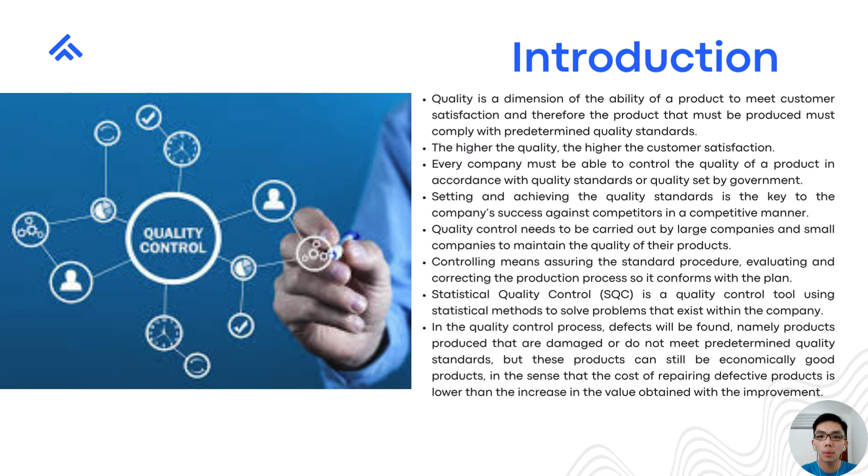Defective products are products that the manufacturer does not want, but sometimes the existence of a defective product itself is unavoidable and even always exists in the production process. The existence of a defective product within the company may not be used by the company, but it can. Types of defects will vary in each industry.

This article mainly discusses the literature review on quality control over the years. The articles were gathered and organized into a comprehensive literature review that will give a broad understanding of the definition of quality control, its function, its relation to production process management, the quality control approach, and its tools.

Quality management is a way to improve performance continuously at every level of operation or process in every functional area of an organization using available human resources and capital. Quality management is all activities of the overall management function that determines quality policies, objectives, and responsibilities and implements them through tools such as quality planning, quality control, quality assurance, and quality improvement.

Quality planning is the establishment and development of goals and requirements for quality and the implementation of a quality system. Quality control is the techniques and operational activities used to meet quality requirements. Quality assurance is all planned and systematic actions implemented and demonstrated to provide sufficient confidence that the product will satisfy the need for a certain quality.

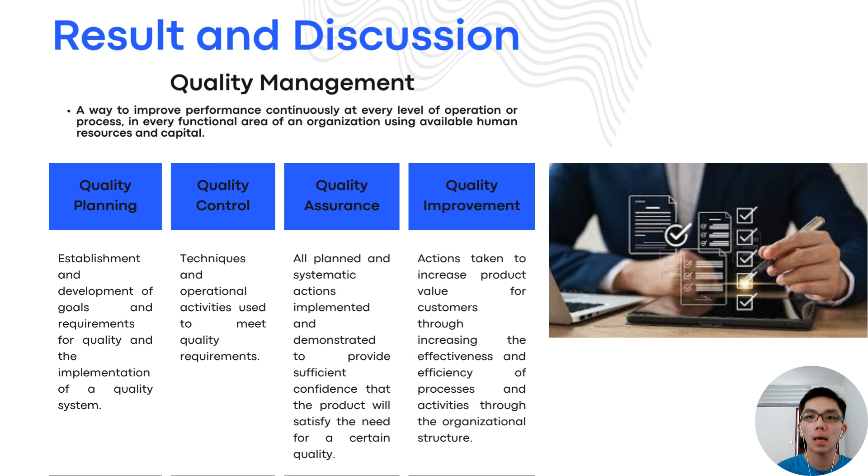Quality improvement are actions taken to increase product value for customers through increasing the effectiveness and efficiency of processes and activities through the organizational structure. Production management is an activity to organize and coordinate the use of human resources, tool resources, and financial and material resources effectively and efficiently in order to create and increase the use of goods or services.

Others argue that production management is an activity or process that transforms input into output. The main activity concerned with production management is the production process. The production process is a method and technique for creating or adding to the use of an item or service by using sources including labor, materials, funds, and other resources needed. In other words, the production process is the activity of how the product is finished from raw materials involving machinery, energy, technical knowledge, and others.

And some others see it from the perspective of methods and techniques used by people to transform raw material into products. Production process will result in products, which can be anything that can be offered to a market for attention, purchase, use, or consumption that can satisfy a want or need. Conceptually, the product is the subjective understanding of the manufacturer of something that can be offered as an effort to achieve organizational goals through fulfilling consumer needs and activities in accordance with organizational competence and capacity as well as market purchasing power.

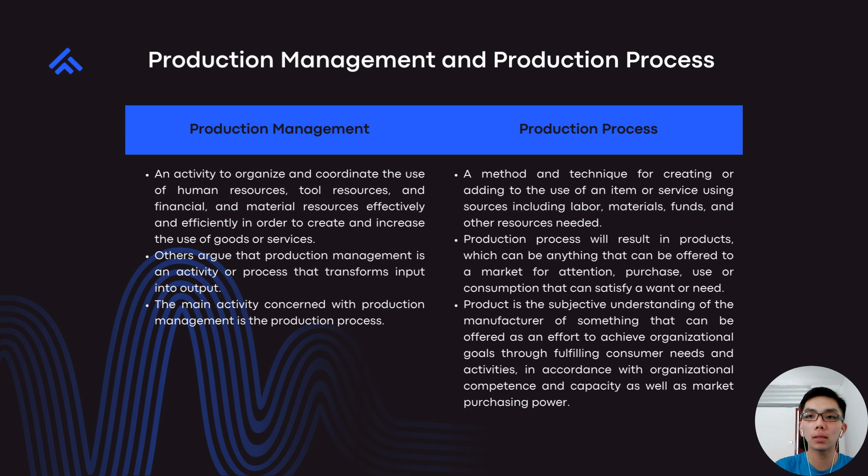Product is the central point of marketing activities because the product is the result of a company that can be offered to the market for consumption and is a tool for a company to achieve its goals. A product must have advantages over other products in terms of quality, design, shape, size, packaging, service, warranty, and taste in order to attract consumers to try and buy the product.

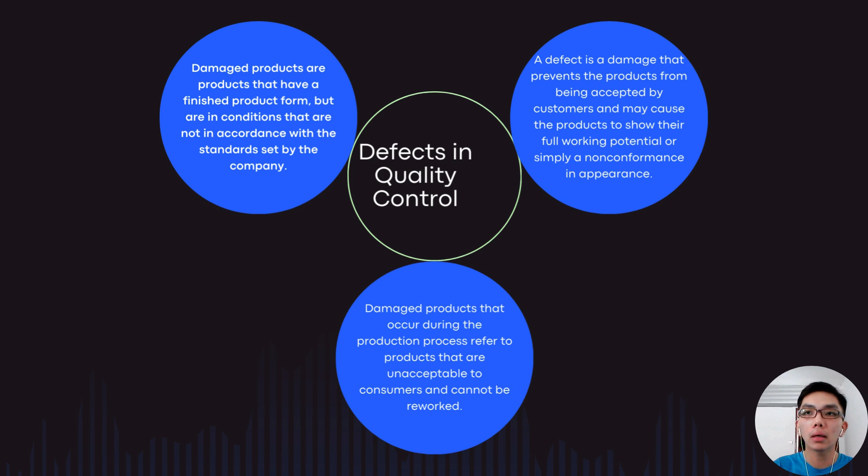Next is about the defects in quality control. Damaged products are products that have a finished product form but are in conditions that are not in accordance with the standards set by the company. There may be damaged products that can be sold, but there are also those that cannot be sold, depending on the condition of the item, whether the damage is within normal or abnormal limits. Damaged products that occur during the production process refer to products that are unacceptable to consumers and cannot be reworked.

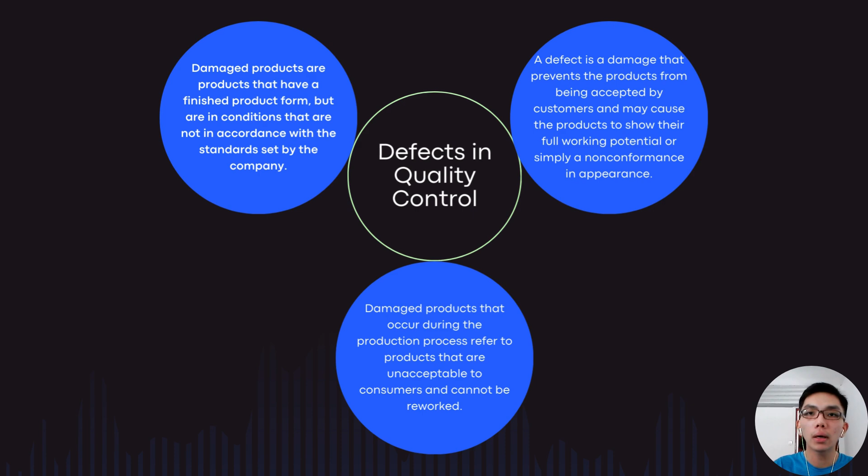A defect is a damage that prevents the products from being accepted by customers and may cause the products to not show their full working potential, or simply a non-conformance in appearance. Because consumers really want a quality product to meet their needs, companies are required to create a quality product for survival of the company. Therefore, today's companies must know and understand the ins and outs of customers by paying attention to the quality of a product produced. Quality is the totality of the characteristics of a product or service that supports its ability to meet specified needs. When we measure quality statistically, we look if there is any variation in measurement between what the customer asks for and what the company produces.

There are some factors that influence the quality control carried out by the companies. One of the factors is the process capability. The limits to be achieved must be adjusted to the capabilities of the existing process. There is no point in controlling a process within limits that exceed the capabilities of the existing process.

Next factor is applicable specifications. The specifications for the production results to be achieved must be applicable when viewed in terms of process capability and the desires or needs of the consumers to be achieved from these production results. In this case, it must be ascertained beforehand whether the specifications can apply from the two aspects mentioned above before quality control in the process can begin. Next factor is acceptable level of non-conformity.

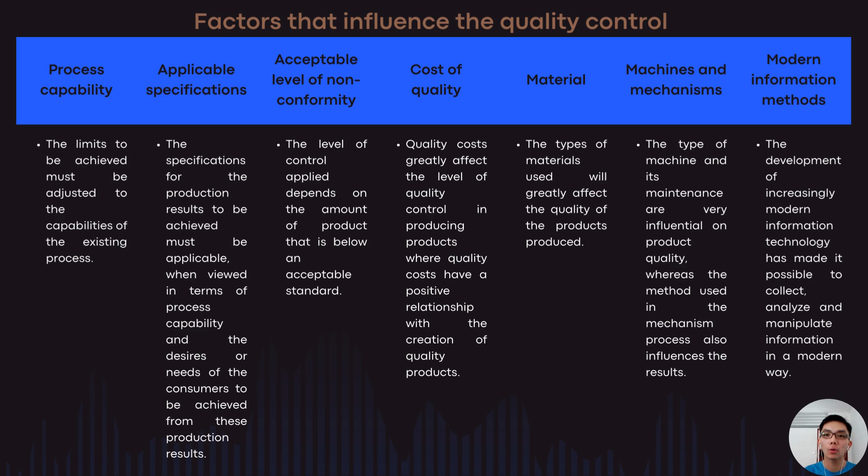Last but not least, modern information methods. The development of increasingly modern information technology has made it possible to collect, analyze, and manipulate information in a modern way. This sophisticated method of processing data and receiving information can affect the development of the quality of a product that is made. Information through computerization that is getting faster and more accurate in managing data and analyzing it also contributes to the success of product quality.

Next is about the quality control purpose and approach. Quality control is an important activity in the company to find out the damage that occurs to the product so that the company can maintain the quality of the products produced in accordance with the standards set by the company. The purpose of quality control is to control the quality of products or services that can satisfy consumers.

The objectives of quality control are to reduce errors and improve quality, inspire good teamwork, encourage involvement in the task, increase motivation in employees, create the ability to solve problems, improve communication and develop relationships between managers and employees, develop high security awareness, and promote employees and develop products properly.

Quality has very broad activities because all quality controls must be considered. Quality control can be broadly grouped into three levels. The first level is the raw materials approach. The raw materials balance approach is a very important factor for the continuity of the production process, which is very dependent on the availability of raw materials and the quality of the raw materials themselves. So, the company should also pay attention to quality control of raw materials. The company produces a product where the characteristics of raw materials greatly affect the characteristics of the products produced.

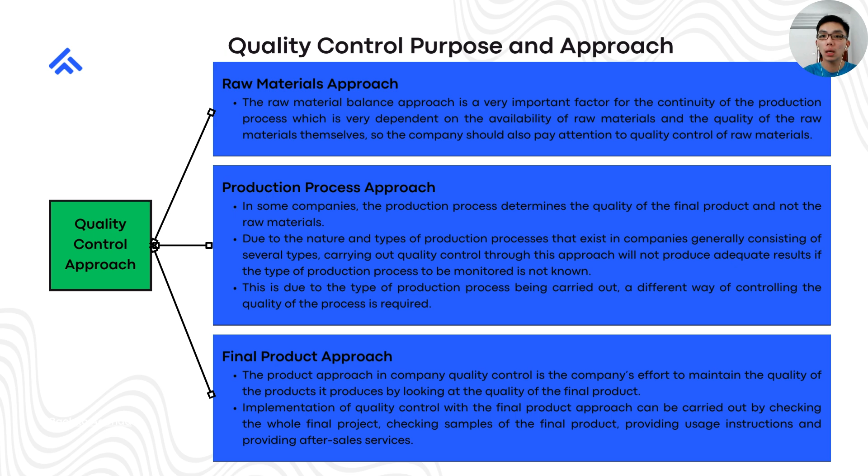The final level is the final product approach. The product approach in company quality control is the company's effort to maintain the quality of the products it produces by looking at the quality of the final product. Implementation of quality control with the final product approach can be carried out by checking the whole final product, checking samples of the final product, providing usage instructions, and providing after-sales services.

Next is about the quality control stages. So to attain effective quality control results, the control of the quality of a product can be carried out using quality control techniques, because not all production results are in accordance with established standards.

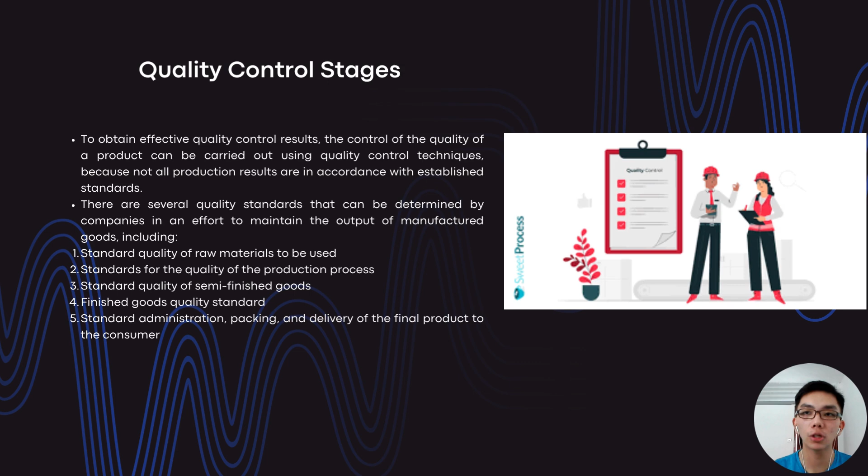There are several quality standards that can be determined by companies in an effort to maintain the output of manufactured goods, including standard quality of raw materials to be used, standards for the quality of the production process, standard quality of semi-finished goods, finished goods quality standard, and standard administration, packing, and delivery of the final product to the consumer.

Last but not least is about the statistical quality control (SQC). SQC is a tool that plays an important role in making products according to specifications in the process from start to finish. There will always be unintentional interruptions in many production processes. Unexpected disturbances are considered problems that can still be tolerated if the disturbances that occur in this process are relatively small. Likewise, disturbances can be said to be disturbances that are outside the tolerance limit if the disturbance in this process is cumulatively large enough.

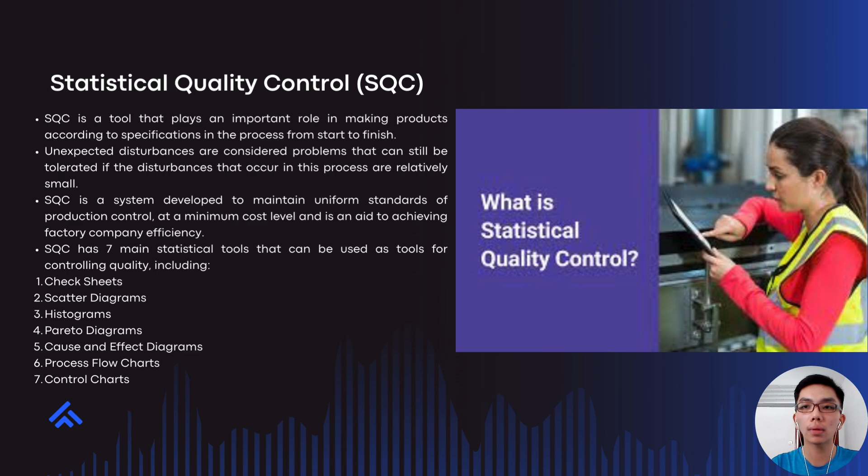SQC is a system developed to maintain uniform standards of production control at a minimum cost level and is an aid to achieving factory company efficiency. SQC has seven main statistical tools that can be used as tools for controlling quality, including check sheets, scatter diagrams, histograms, Pareto diagrams, cause and effect diagrams, process flow charts, and control charts.

There are two types of quality control tools that have been discussed in the journal. So one of it is the Pareto chart. It was first introduced by an Italian economist named Vilfredo Pareto, which states that 80% of the consequences originate or are produced by 20% of the causes, or it can also be translated as 80% of business results are the fruits of 20% of productive and optimal efforts.

Pareto diagrams are made to find problems or causes that are key in solving problems and comparisons to the whole. Pareto analysis is a technique for focusing attention on the most important problem areas. The Pareto chart is a method for managing errors, problems, or defects to help focus attention on efforts to solve the problem and is a proper tool for increasing strong control.

The use of Pareto diagram charts is as follows. Helps a team focus on the causes that will have the greatest impact if resolved. Displays the relative importance of the problem in a visual format that is simple and can be interpreted quickly. Helps prevent diversion of the problem where the solution eliminates some causes but exacerbates others. Progress is measured in a highly visible format that provides incentives to drive more improvement. Pareto analysis can be used in the application of increased manufacturing or non-manufacturing control.

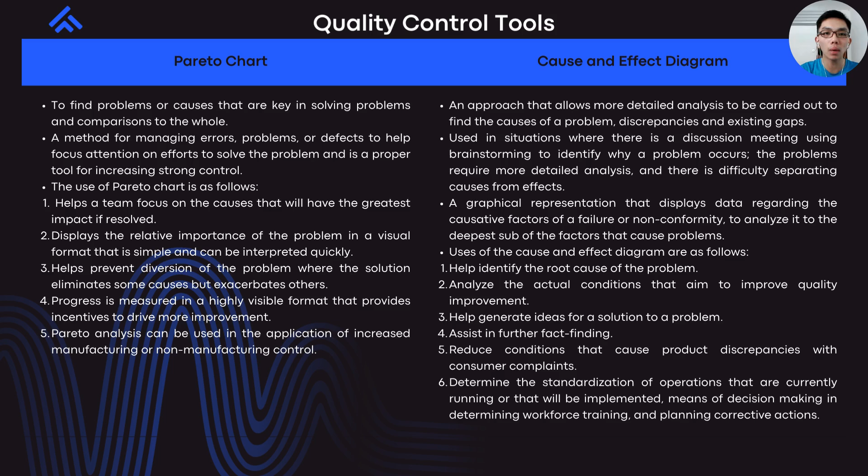Help identify the root cause of the problem, analyze the actual conditions that aim to improve quality, help generate ideas for a solution to a problem, assist in further fact-finding, reduce conditions that cause product discrepancies with consumer complaints, determine the standardization of operations that are currently running or that will be implemented, means of decision making in determining workforce training and planning corrective actions.

In conclusion, quality is a combination of the properties of goods and services that demonstrate their ability to meet customer needs. In the production process, products are meant to be produced according to the specification required and set by the company. However, some defects may be found in the process, whether they were caused by the production process, raw materials, etc. Therefore, quality control is an essential aspect of production. Quality control can be done using several tools, and each tool can help the company to maintain its quality.